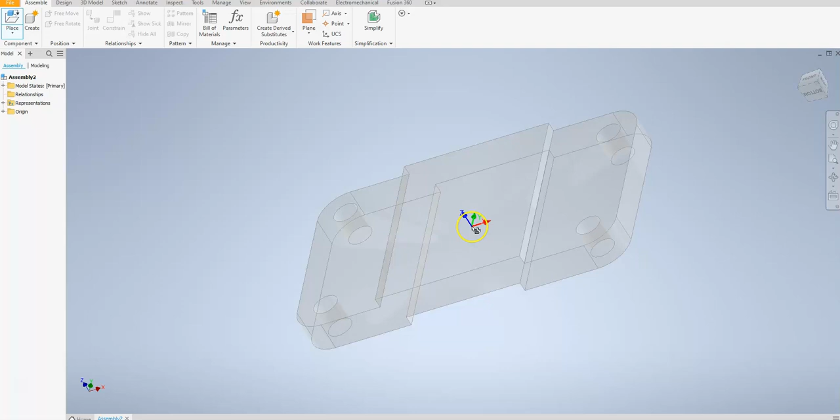You can see that I've gone ahead and loaded up a blank assembly model. I'm going to go ahead and place my first component, which is going to be my plate for my particular joint. I'll insert that, turn this around, hit escape so I don't accidentally insert another one, and make sure I put this in an orientation I can see. So I'm going to ground this component, go down to my grounded list, that way I can make sure it's fully locked down, and I can check that in my model browser here.

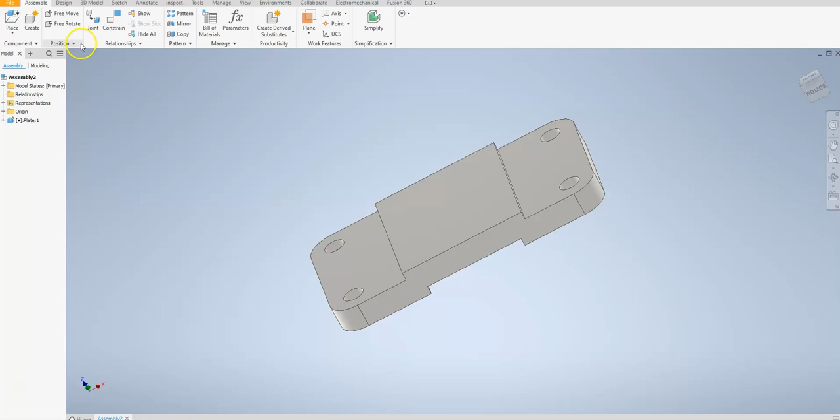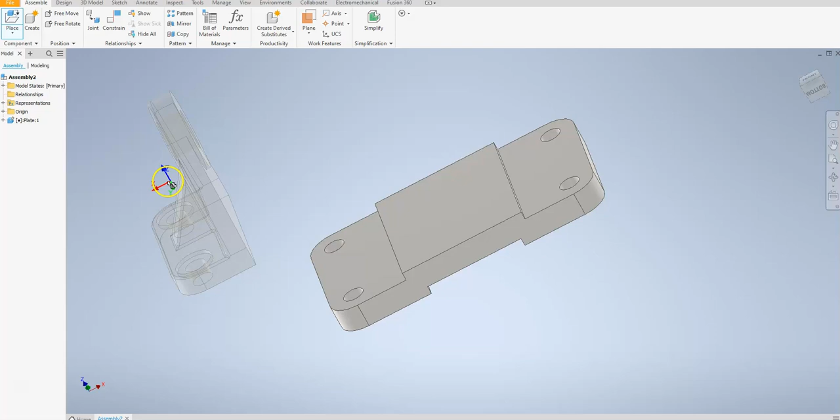Okay, the next step is I'm going to go ahead and place my second component, and that's going to be my bracket. I'm going to have to put this in an orientation that's close to what I want it to be in, so I'll rotate this a couple times about the Z-axis. That's a nice thing I like about Inventor - before I hit OK, I can go ahead and rotate this to get it in the correct orientation. That way it's easier to place. And I can click and hit escape to go.

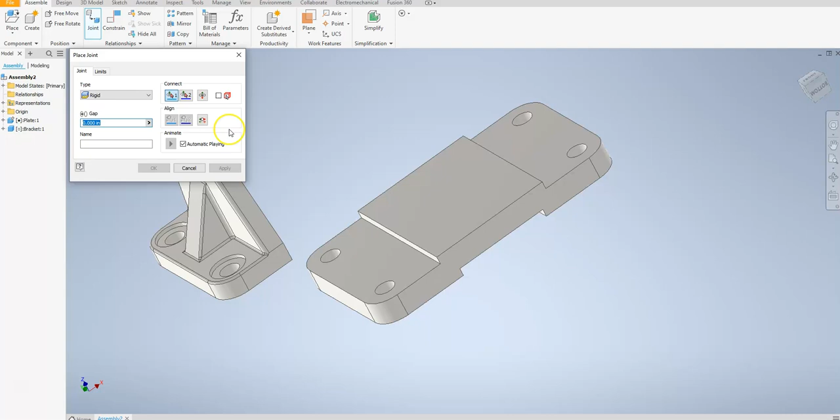Okay, so I'm ready to apply my first joint. Now, if you'll notice, this might be in a different orientation than it was a couple seconds ago because I paused the video. I just want to, and it's going to allow me to make a really good point: when you select joint and choose the type of joint you want, the first object you want to select is the one that's going to move. Do not select the grounded object first, because then you're going to get a message saying, hey, this is grounded, do you want this to move. So what I want to do here is select this piece, because that's the one that's going to move.

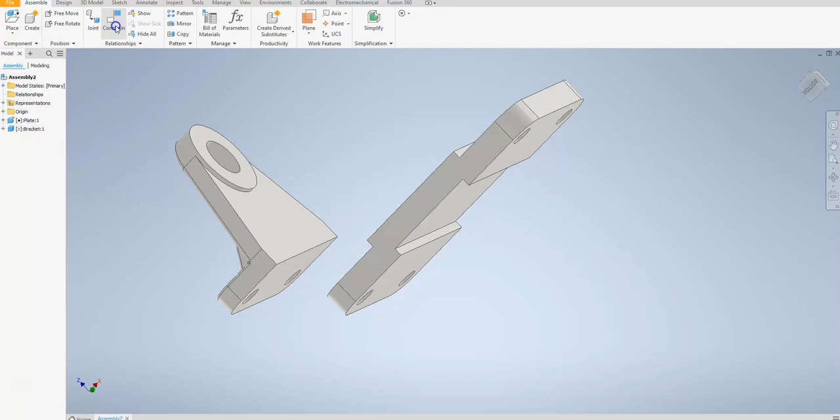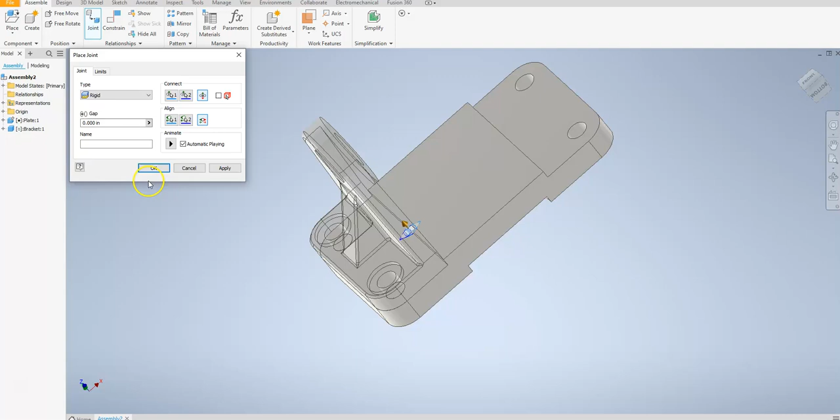Rigid. There. And then I'm going to go ahead and select this here. You can see that it puts it into position, but it's not exactly where I want it to go. So I want to go ahead and mess around with my buttons here. I don't want to flip it, but I want to change my alignment. So you can see that's a way you can manipulate it to get into the correct direction you want it in, and say OK, and it applies.

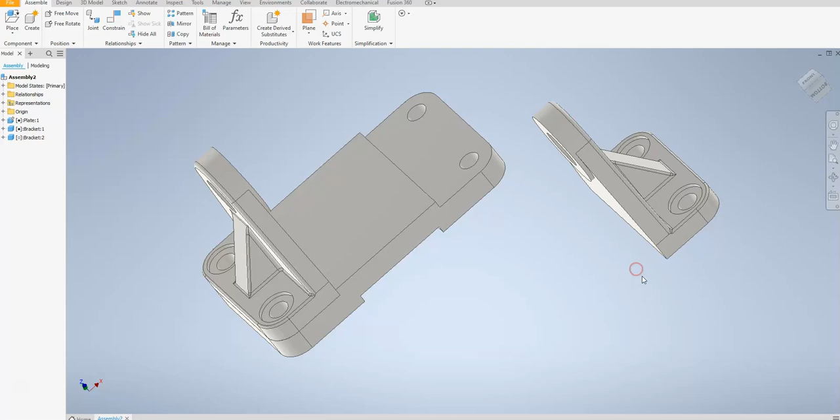And that's what we want. Now I want to put another bracket on the other side. So I'm going to place another bracket, place the bracket open. And this is in the good orientation that I want. So I'm going to place it and hit escape. And I'm going to do something similar to what I did over on the other side.

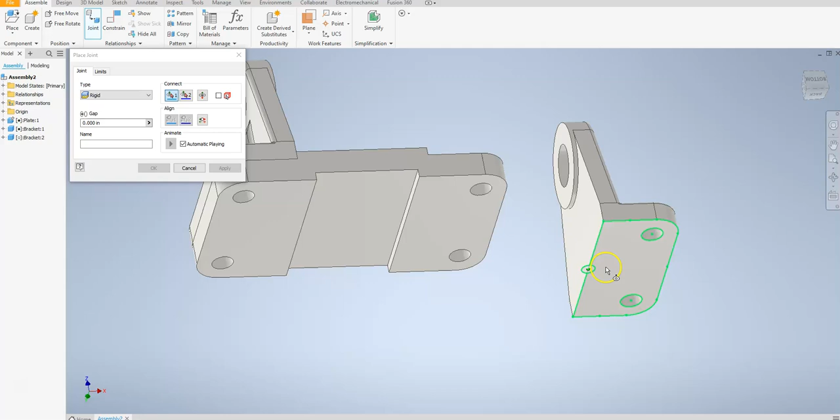So I'm going to go ahead and go to my joint, go to rigid, okay, and select my proper faces. That way I can go ahead and apply that joint. I'm going to select the bottom face. I want to make sure that center button is highlighted, because that's going to allow me to put that in the proper location. And there we go. And then, of course, I need to do some alignment to make sure that's in the correct location, and say okay, there we go.

The next step that I have is to go ahead and put my axle in, and that axle is going to go between those two holes. So I'm going to go ahead and place my axle, and rotate this so that it's in the proper orientation. I'll place it over here and hit escape.

Now, I probably didn't need to rotate it because when I apply the joint, it's going to rotate it automatically. But still, it's good to do that just to keep things organized for you. Okay, now the next step is to apply a joint constraint between my axle here and the holes that are on my bracket.

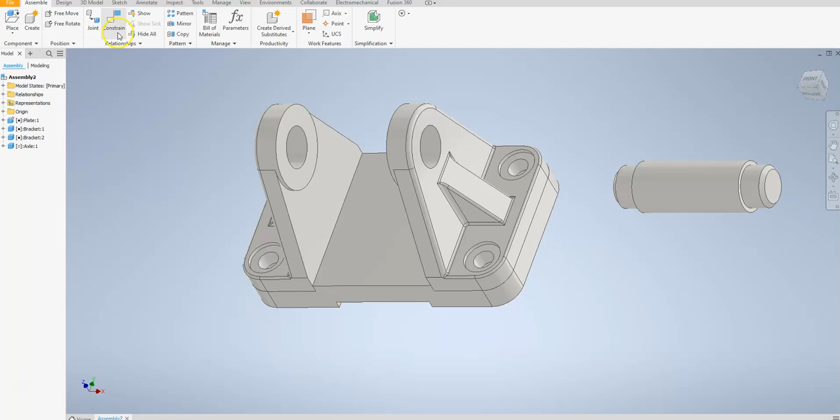So I'm going to go to joint, and in this case select cylindrical. Now, if I look at my references, I want to select this outer diameter, and you can see my center is highlighted. Then I want to select this hole. Now it moves it back and forth, showing there's still some movement allowed there. I'm going to hit OK.

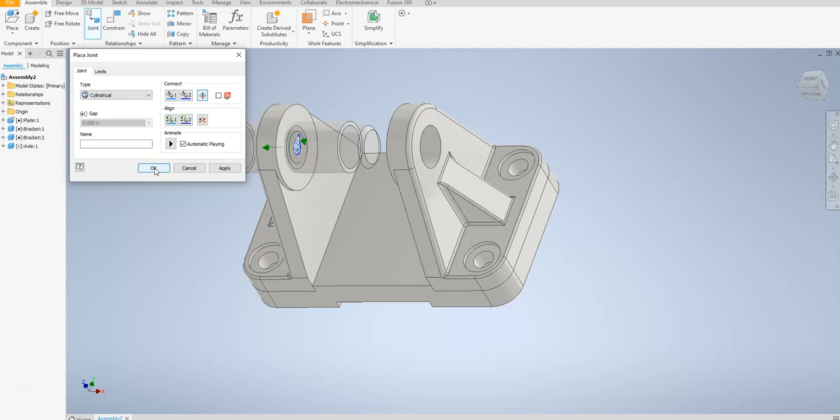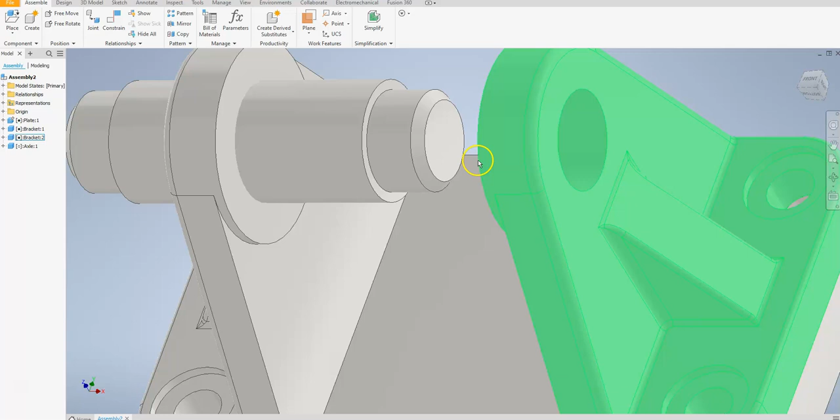Okay, and that's not really in the correct place that I want. So I'm going to apply a flush constraint to move this into the proper position. I still want to allow the rotation, and that's what the cylindrical joint is going to allow me to do. But I want to make sure we have a flush constraint between this surface here and the mating surface on that bracket.

So I'm going to go to joint again and apply a constraint. I'm not going to apply a joint in this case, I'm going to go to constraint, and put a mate constraint here, and make sure that it's flush. Okay, I'm going to change my offset.

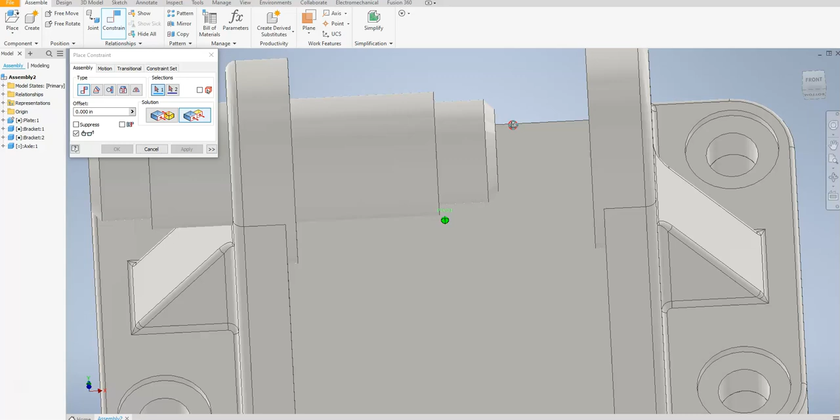I went ahead and played with this a little bit before, and if you want to, you can put this in first and then play with your directions or values. But I already know what this number is going to be because I did some research ahead of time. So what you might have to do is figure out what the distances are, do some analysis. I use the analysis tools up in the inspect menu to analyze distances, so I could figure out what clearances I needed.

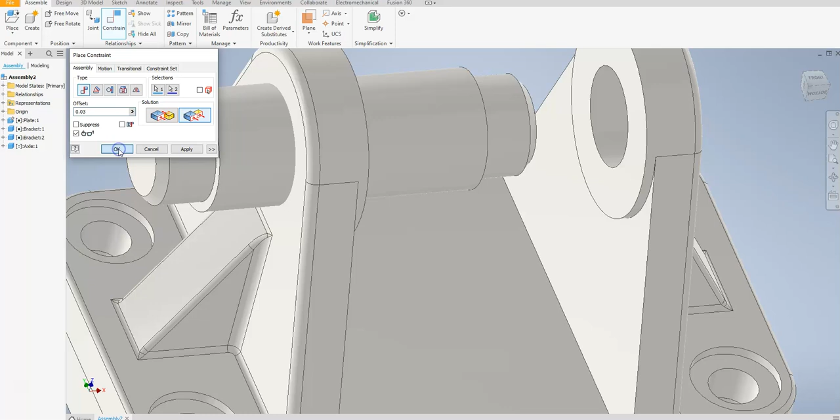So I'm going to apply my flush from here to there, and I have my offset distance. Okay, I tried to do a constraint and it wasn't working, so I had to go back and mess with it a little bit.

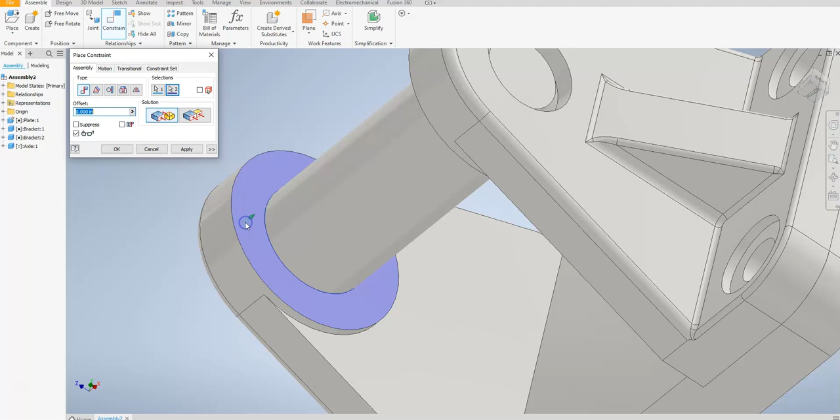But if I go to mate, I need to choose the proper surfaces. So I got to go here and here, and then it works. But if you take a look at it, there's this huge gap on this side, and there's not one there. So I'm going to change this to 0.03, and hit apply, and it actually centers it right in the position that I want. So that's what I'm looking for.

Okay, so again, with this assembly modeling, whether you're using the constraining or the joint tools, sometimes you will have to mess around with that.

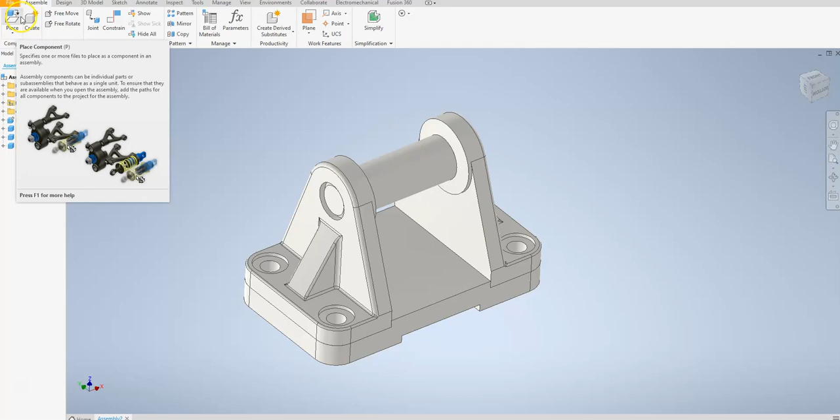I'm going to go ahead and put my last component in, and that's going to be the wheel. Actually, it's not my last component, it's going to be one of my last components, the wheel. Open. And I'm going to rotate this in my X direction so that it's in the correct orientation that I need. Okay?

All right, and I'm going to apply my next joint with this. I want to go ahead and put a rotational joint. I'm actually going to use automatic this time just to show you how that works. So I'm going to go to automatic.

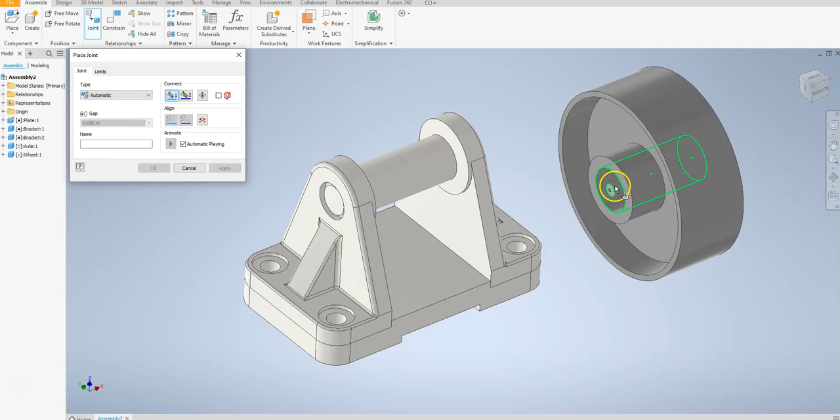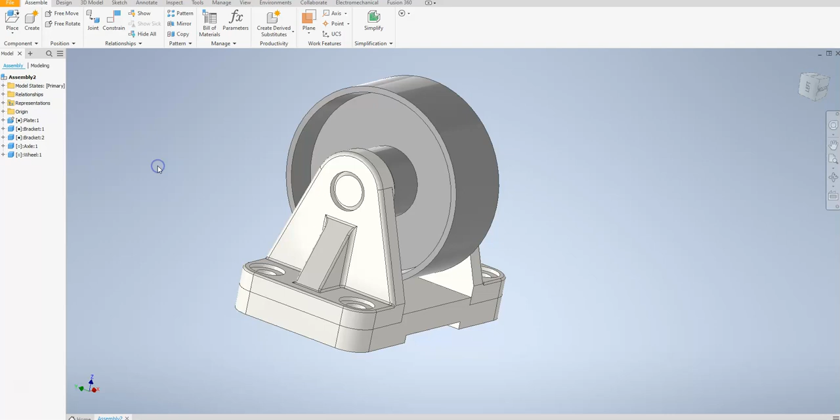And I want to select the inner, and make sure that this inner circle, the midpoint, is selected. Okay, and then I want to make sure that the midpoint of the pin is selected. And you can see that it goes ahead and applies a cylindrical, and that's what I want. And then it's in the proper location, so that's exactly what I want there.

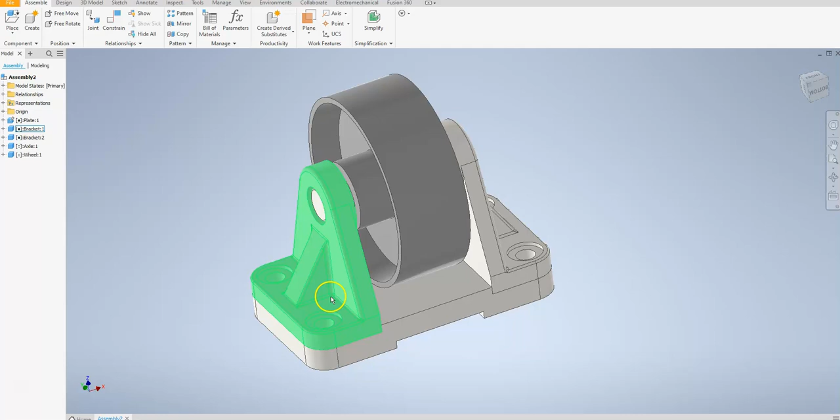Now you'll see that the axle and the wheel are not fully constrained, and I want to keep it that way because I want to make sure that these parts can rotate in case I want to make an animation. So the last thing I need to do is put some pins, screws, or bolts in place to secure my brackets to my plate.

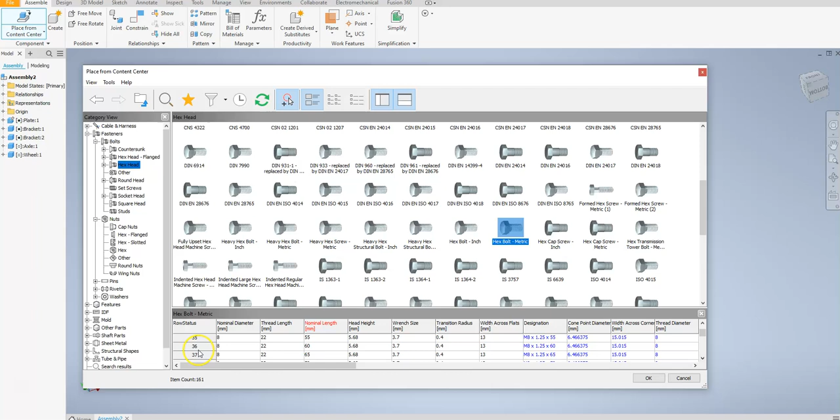I found my hex bolt metric, and I know that I need to go down to row 35 because I did a little bit of research early on to find the correct size that I need. So I'm going to go to 35, double click that. You can see it kind of looks tiny. Going back to select the proper size, it's in row 45, M10 by 35. I click on that.

And it's still tiny. Okay, and we're going to try to insert this. And you can see that it resizes it for us.

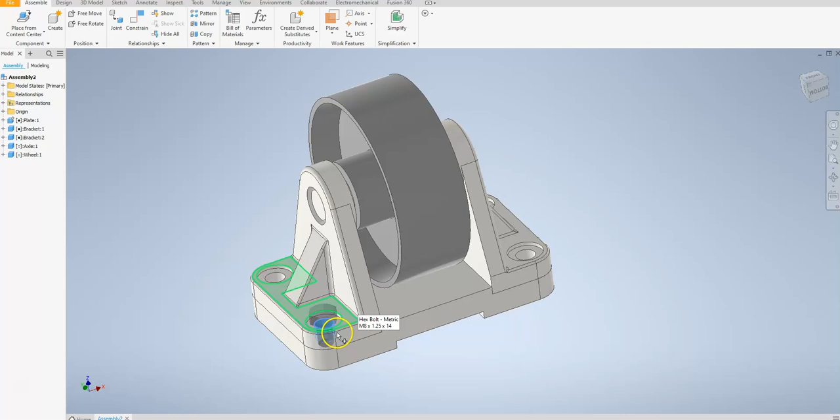Now I'm going to go ahead and put a joint in here, a rotational joint. I'm going to go ahead and apply the bottom of the bolt and the core of the plate. Now, when you're looking at this, you can see that it resizes the bolt automatically.

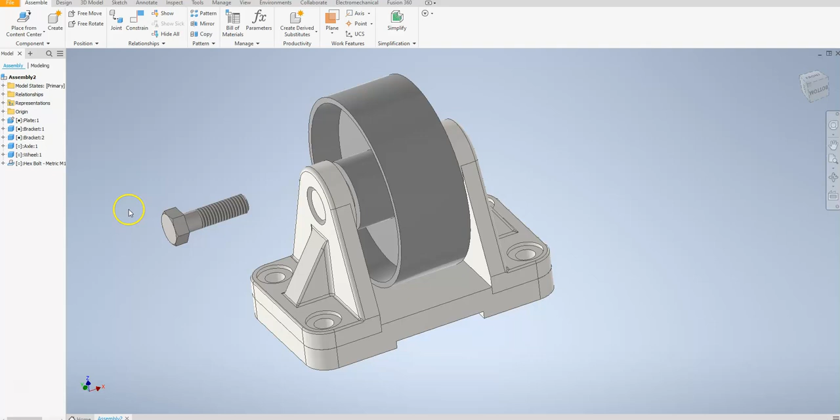So I'll escape out of this. Now I'm going to apply my rotational joint. I'm going to go to joint, go to rotational, and select the bottom of the bolt. I have to rotate my picture here a little bit to select the bottom of the bolt. I'm going to zoom in so I can select that bottom of the bolt.

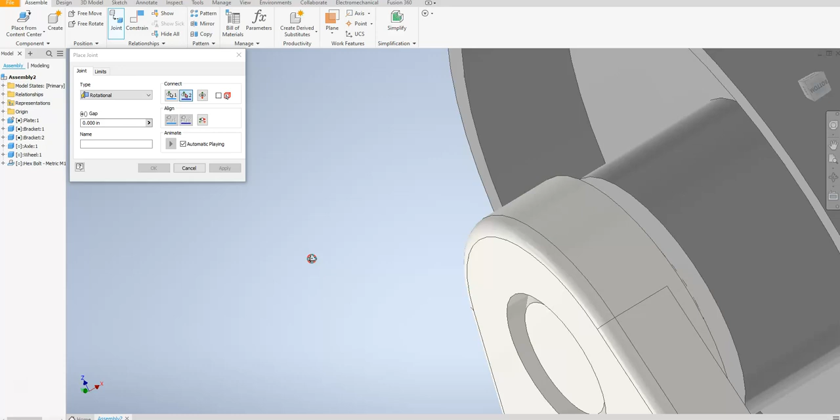And I'm going to zoom out so I can select the proper hole, the counterbore area of that, which is right there. And you can see that it puts it in place. But that's not correct. I'm going to hit cancel and try that again.

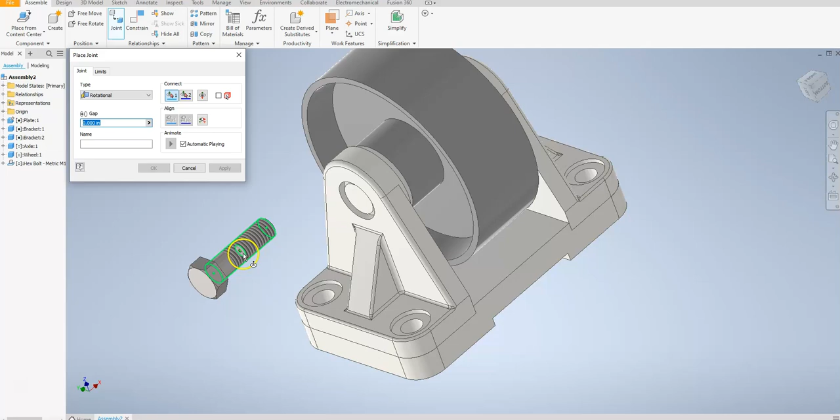Constrain, say joint, rotational. And the reason why I did that is because it didn't have the center circle selected. There we go. Now we got it correct, because it needs to have that center point selected. And there we go, it's in the proper position. Hit OK, and there it is.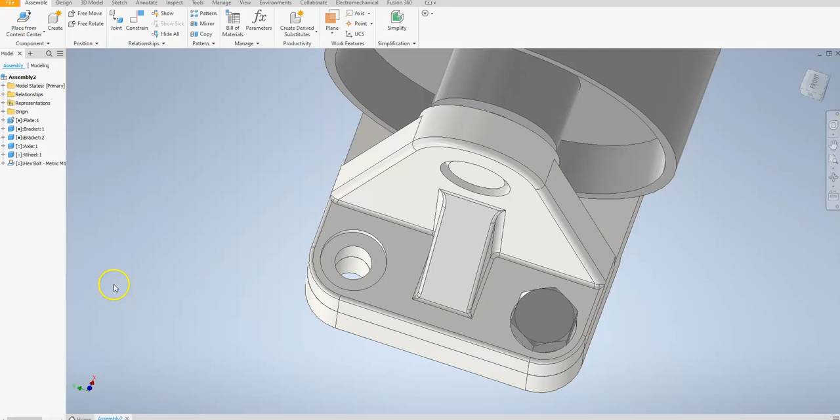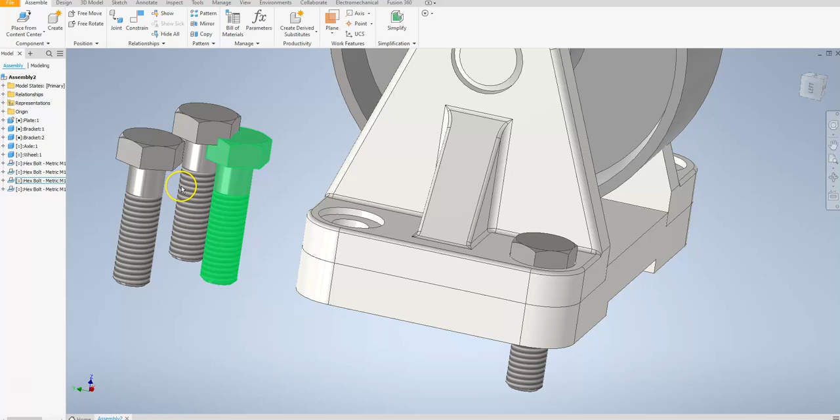And now that I have that bolt in, I need to place 3 more bolts. So I'm going to go ahead and copy and paste it if I want to. Let's try that. Copy and paste. Okay, and then paste again. We'll try to paste this one more time. Copy, paste, and I need 1 more bolt. Copy, paste. Now I've got 3 of these bolts here, and yes, they are overlapping, but that's okay.

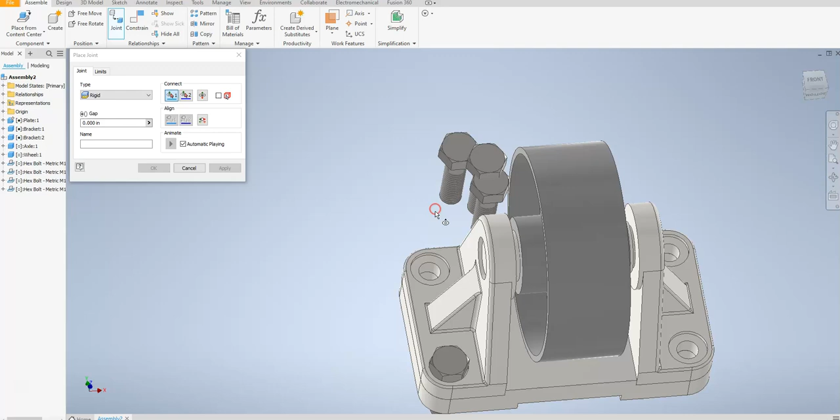So I'm going to basically put these in the other holes, but instead of the rotational joint, I'm going to use the rigid joint. So I'm going to go to rigid, and same as before, I'm going to use the same location points for my particular areas. I need to hover over this and make sure that the center is highlighted, and it moves it into the correct position.

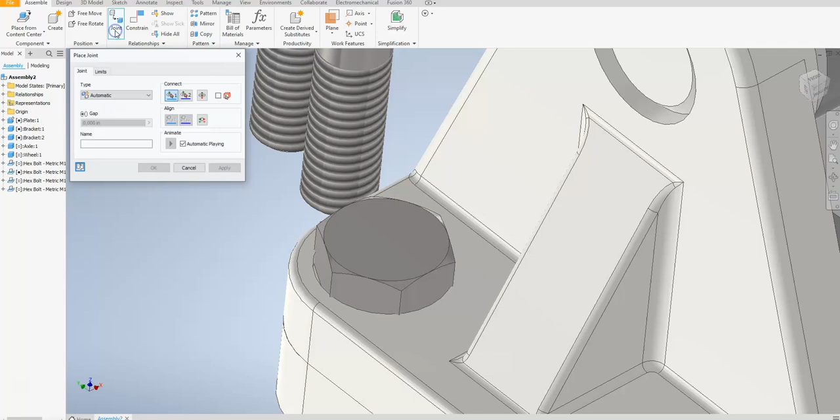I'll say OK. I'm going to apply another joint, rigid, with one of the other bolts, making sure that the center is highlighted. Going over to one of the other holes. And it moves it into the correct position. And then I've got 1 more to do, and then I'm all finished. Rigid.

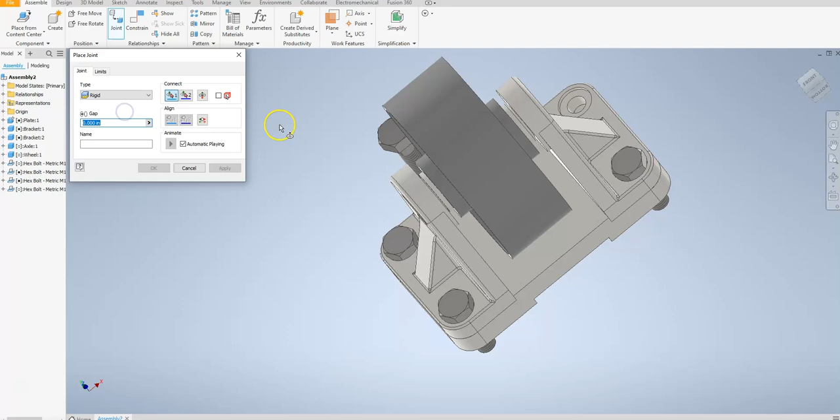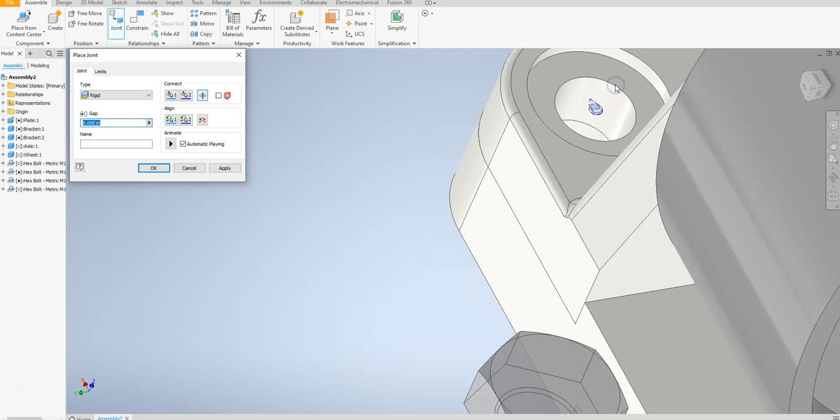Zoom in to select the proper geometry. Zoom out so I can go over to the correct hole. Rotate this a little bit. And there we go, we are in the correct location. Zoom out, and we can see we have my assembly completely finished using the method of joints.